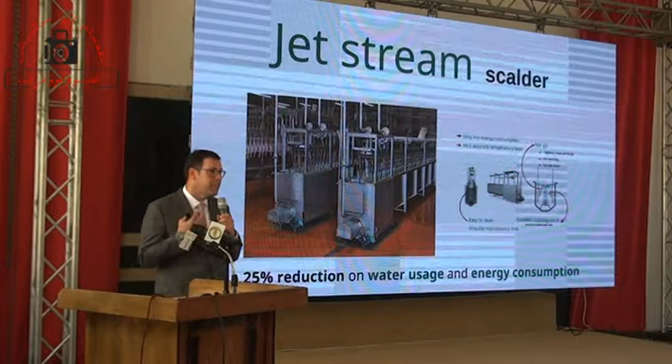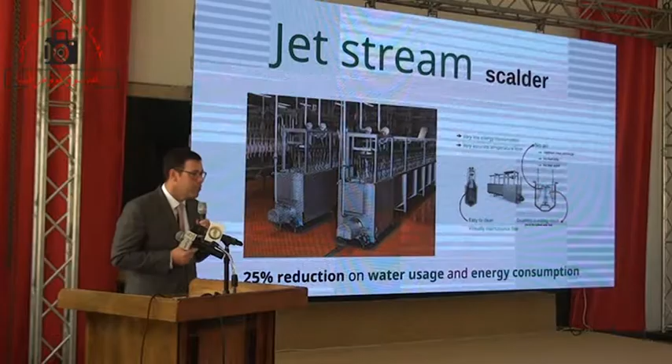Then when we move into the defeathering department, there are many processing steps, but the key steps are scalding and plucking. The bird goes into a warm water bath to make it easy to get the feathers off during plucking. Now when we look at the scalder, we have a unique technology where we do not use any air.

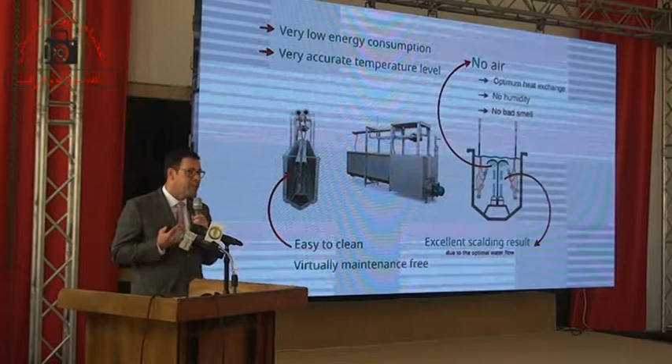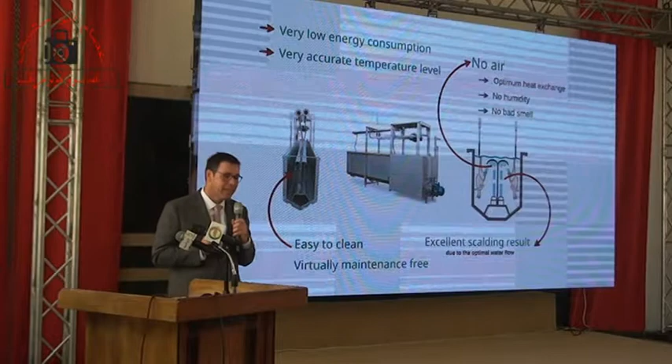Now you may think, what is so special about not using air? Conventional scalders needed air to make sure that the bird would not float out of the shackle. We have created a water stream without air to make sure that the bird will stick in the shackle.

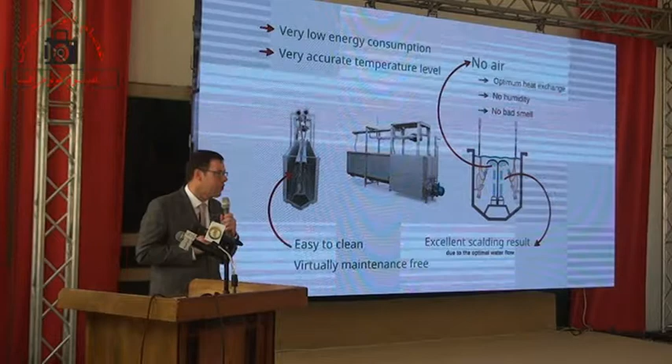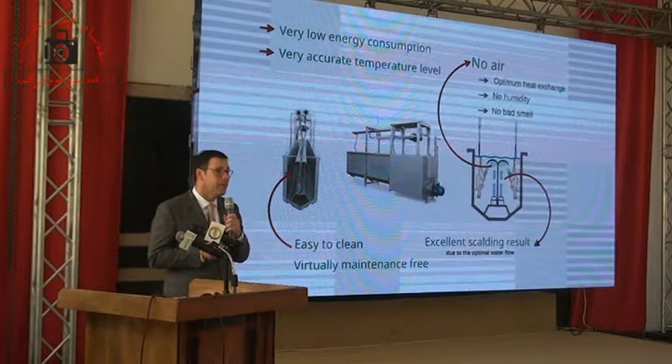The huge benefit of this is that water is a much better heat transmitter than air, so therefore the scalding result will be much better. The second benefit is that you will not have the humidity which you usually have in this area, and we will not have the bad smell.

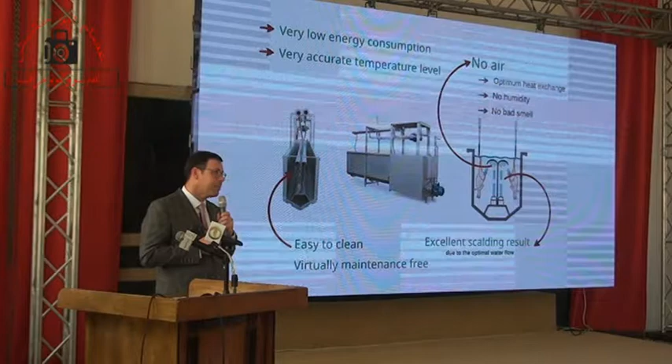Furthermore, energy costs come down, and because it is such an easy system to maintain, the maintenance costs come down. Cost of ownership is basically very low.

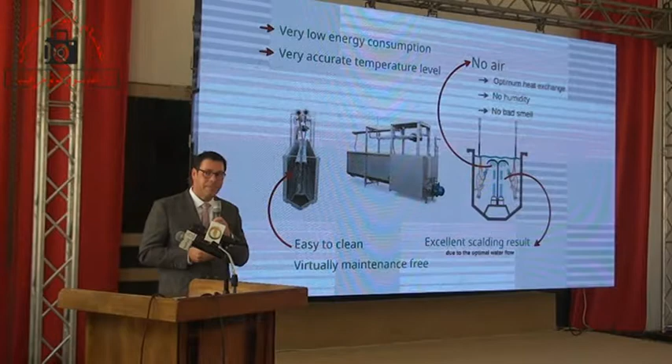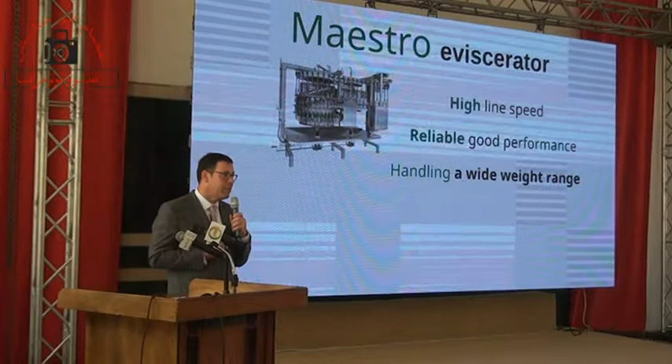When we move to the next department, in the evisceration department, where we clean the bird by taking out the intestines and harvesting the giblets that you can eat, the key processing step is the eviscerator, which in the Meyn world is called the Maestro.

What is so special about this Maestro? This is by far the most sold eviscerator in the world. Our biggest competitor has sold only half of this number.

The reason is that our system has a unique way of getting the intestines out of the bird. A particular spoon, which has been patented, does not damage the intestines, which would otherwise cause cross-contamination or damage very valuable giblets, like an A-quality liver.

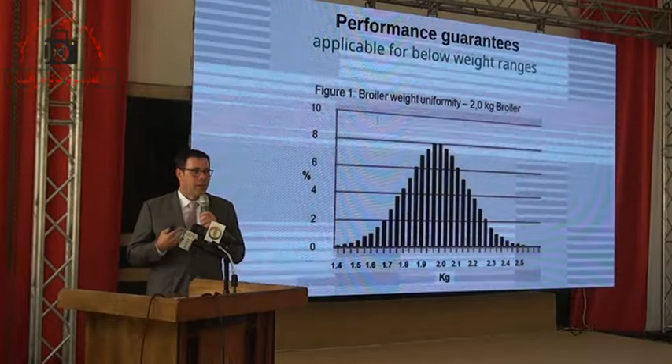And at the same time, we do that for a very wide weight range. When you look at this graph, I assume many of you know this is an ordinary flock distribution, because the challenge is that not one bird is the same, and all of them have to be processed in an incredibly fast way with a high yield and a high quality.

Our closest competitor can only do roughly half of an ordinary flock, while we can do 95% of this flock. This is a key distinguishment between us and other players in the market, and why we are so successful with our eviscerator.

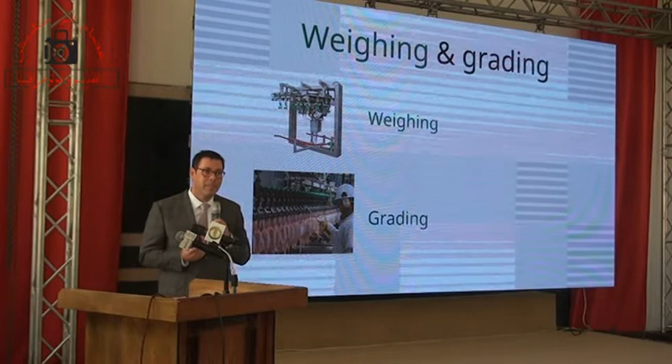After evisceration, the birds need to be chilled. For this, the spin chilling technology is introduced. After the birds are chilled, you want to be able to find a final destination for them: am I going to sell them as a whole bird, or am I going to cut them up or debone? For that, we have the combination of weight and grade, which is the final step that determines the destination.

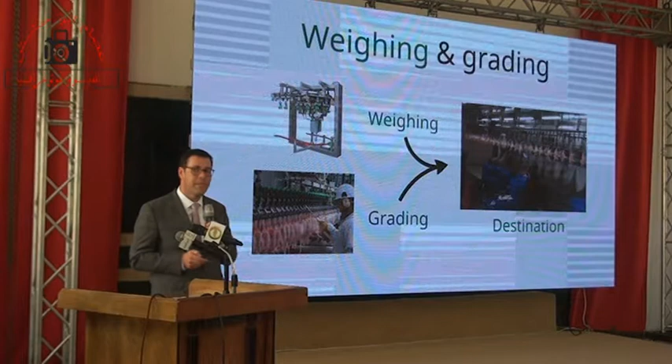Here I would like to conclude my short introduction to the company. Thank you for your attention.